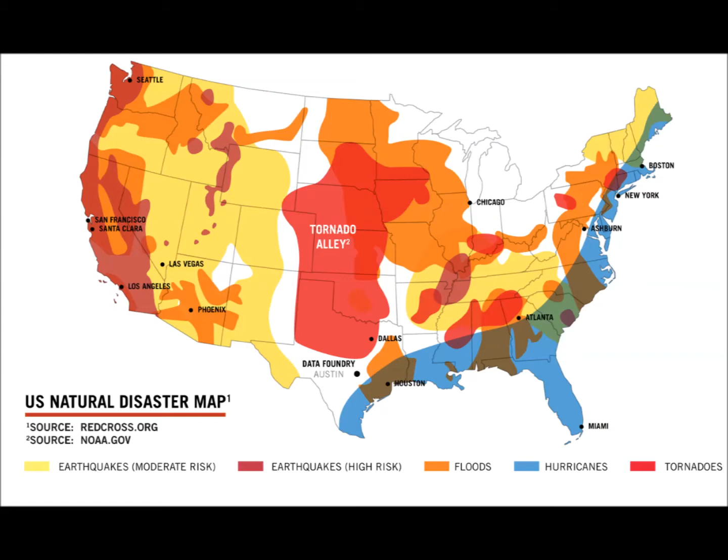Now, how does the most powerful country in the world handle these displaced people? They cram them into cots, put all their personal belongings in a garbage bag, and place them on floors of sports arenas. So obviously, there's a huge housing gap. And returning people to their homes after these disasters is essential to the rebuilding of communities because it provides them with privacy, safety, and ultimately hope.

Another solution to this dilemma is to help support individuals who have lost their homes by quickly providing them temporary relief housing so they can regain a sense of normalcy in their lives. Unfortunately, current relief housing options are typically very expensive and have extensive and complicated installation processes. In addition, relief housing tends to be placed in rural locations far from affected areas because they require a large amount of flat space to fit temporary homes, which unfortunately leads to other issues such as sewage disposal, water and electricity supply, and much more. There needs to be a better solution to this problem.

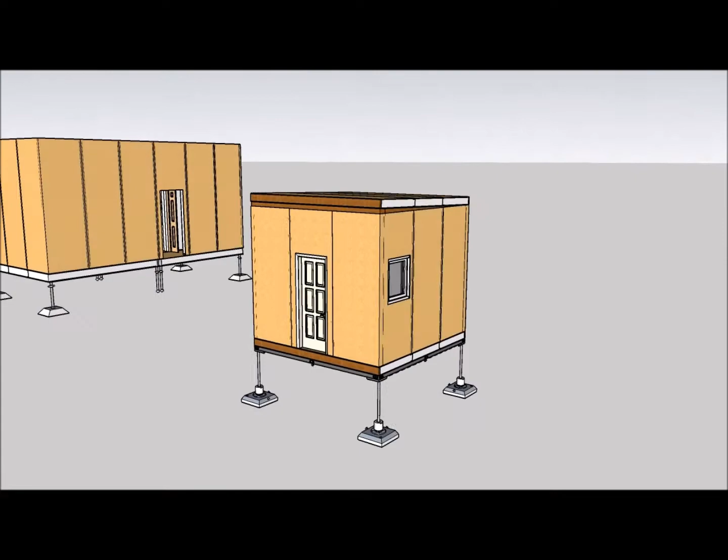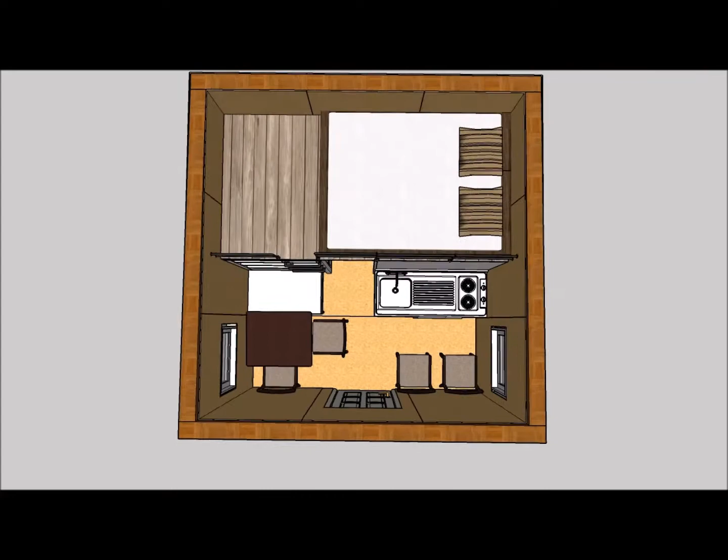Hi, my name is Lorenzo Burke, and along with my partners Tyler O'Malley and Michael Amatrula, we formed the LiMiT team, and we believe we have the solution to relief housing. Our solution, the LiMiT system, is an innovative combination of a foundation and a building which will serve as an alternative relief housing system. The major innovation of our system is the adjustable foundation component, which includes our adjustable mechanism and our foundation. This component can adjust up to 4 feet vertically, and our foundation could be adjusted to sloped terrains of up to 18 degrees, so that difficult sites, which would be rendered unusable without long and expensive excavation by current temporary housing, are no longer an issue. With this innovation, the possible land uses could be increased exponentially, which means people could live closer to their permanent residences.

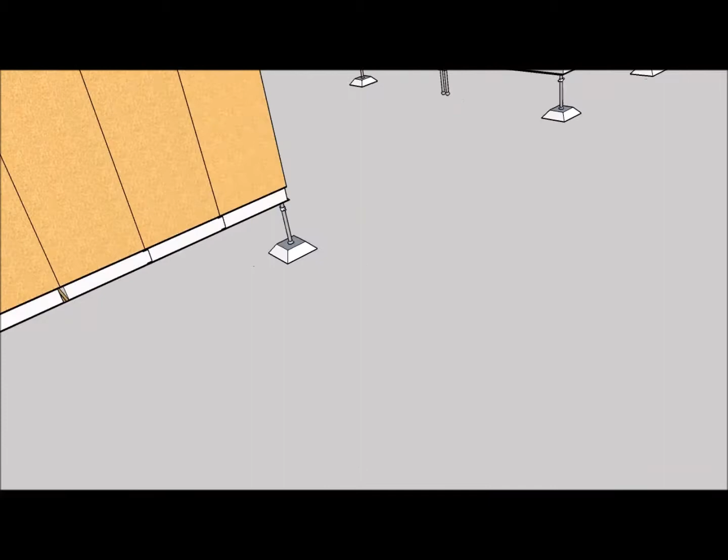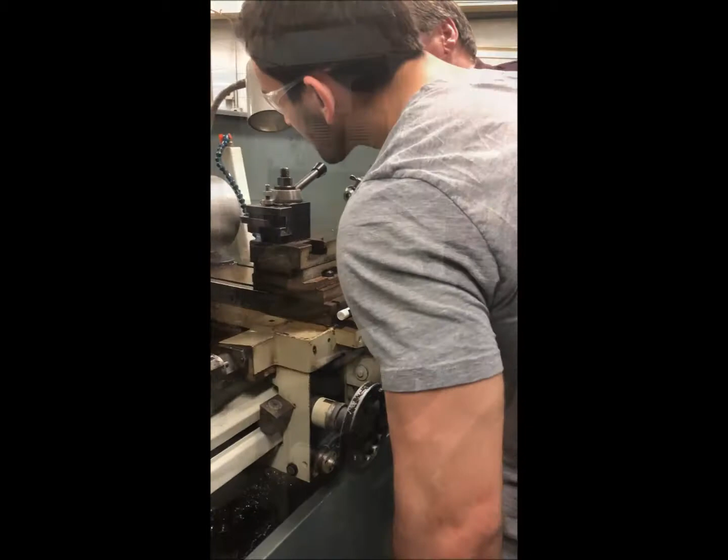The building portion of our system is modular and comes in 3 sizes that can house from 1 to 10 people. With the use of extremely thermally efficient structurally insulated panels, also known as SIPs, as the material for the walls, floors, and roofs, we will also have the potential to save energy, which leads to less expensive housing in the long run. This system can be used as relief housing for any type of disaster. Finally, our system can be transported easily because it is placed on a chassis with wheels. The LiMiT system will be manufactured by using both purchased and machined components. The construction of the system will take place in off-site manufacturing locations.

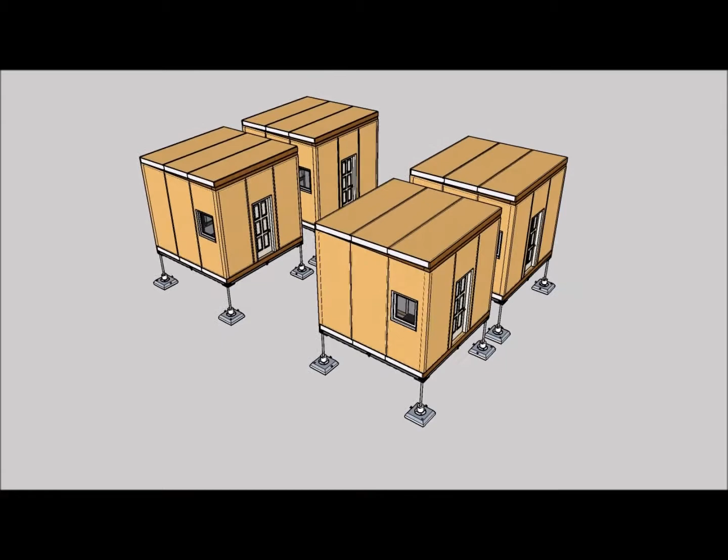In order to market our product, we will advertise online and produce offer packages to FEMA and other organizations. FEMA, one of the main suppliers of relief housing, has an annual budget of nearly $14 billion. In order to bring our design into reality, we are only asking for $200,000. This initial investment will allow us to begin the patenting process, the inspection process, and the mass production of our units, which will cost approximately $15,000 each. With this investment, our product could potentially be ready for use by the summer of 2019.

The name LiMiT can be used to represent limited, since our product is for temporary housing, but it can also be used to represent limitless, since our product has so much potential. So, let's start making victims of disasters feel at home again, while also saving time and money.